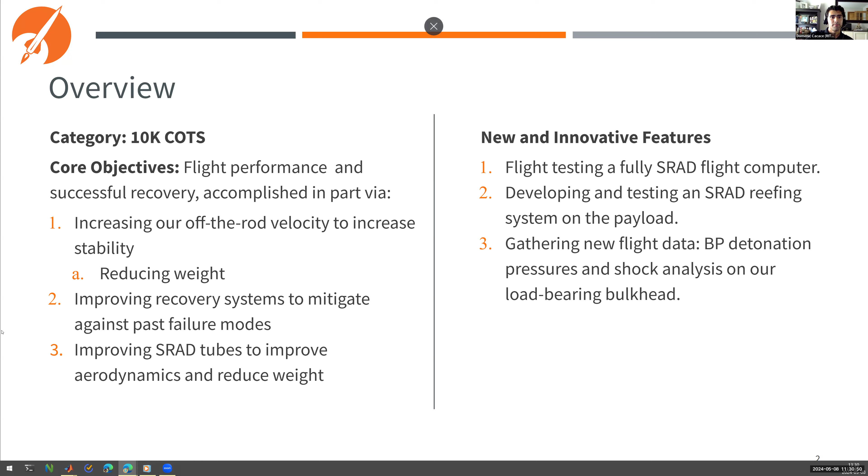So to do a quick concept of operations, most of this is as you'd expect, but to go over some of the main points: immediately upon boost, we've got several different SRAD boards doing data collection on two separate things - the actual load sensing bulkhead we just alluded to, and also some boards on the payload called Grim Reefer. Those will start collecting data and will emit the Fox Hunt trackers for additional methods of recovery as well. So that's right on boost.

We have an M3400 motor from Cesaroni powering this rocket, and the burn time for that lasts around 3 seconds. We'll coast the rest of the way to our apogee, which currently is projected to be around 12,000 feet.

Backing up one second - do you actually have that motor in your possession? No, we don't have that motor. We've purchased it with one of the authorized vendors that ESRA provided, and that will be shipped to the competition where we'll pick it up and assemble it on site. So you've established they actually have the motor. Correct, we've already purchased it and asked them to send it over to Spaceport America. We're following the instructions ESRA has provided in that regard. Okay, I ask because there's some supply issues with Cesaroni motors at the moment, and I want to make sure the motor you think you're using actually exists. As far as we're aware, it does exist. Okay, we'll follow up just to make sure the shipping is going correctly. But to the best of our knowledge, we purchased that back probably upwards of January or December at this point, and it's hopefully been all good for a while now. But we'll double check on that just to be sure.

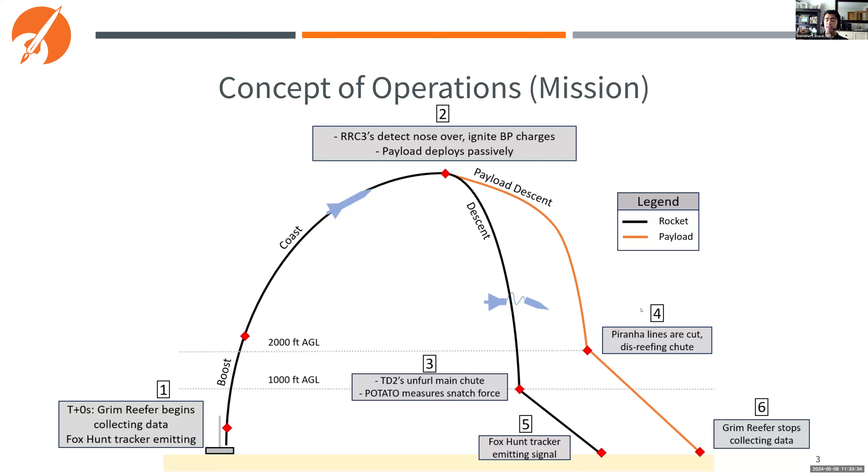The payload will be ejected separately, and as per the reefing system, it'll have its own mission, but instead of deploying at about 1,000 feet, it will unreef and fully expand its chute at about 2,000 feet. But without further ado, that's the overarching mission objectives, and we'll dive straight into some of the more vehicle-specific information.

To give an overview of the structural composition of our rocket, we're using a combination of fiberglass and carbon fiber body tubes. We have 3 tubes on our rocket. The upper 2 are fiberglass and the lower 1 is carbon fiber. All 3 of these tubes we're making in-house with a filament winder with composite tow. We're using 3 layers of 60-degree winds just to give us strength in both the hoop and axial directions.

We've been working on this for a few years, and our big goal this year was just to continue improving our surface finish, which I think we've successfully accomplished. If you have any more specific questions about our tubes, I'm happy to answer. Not at the moment.

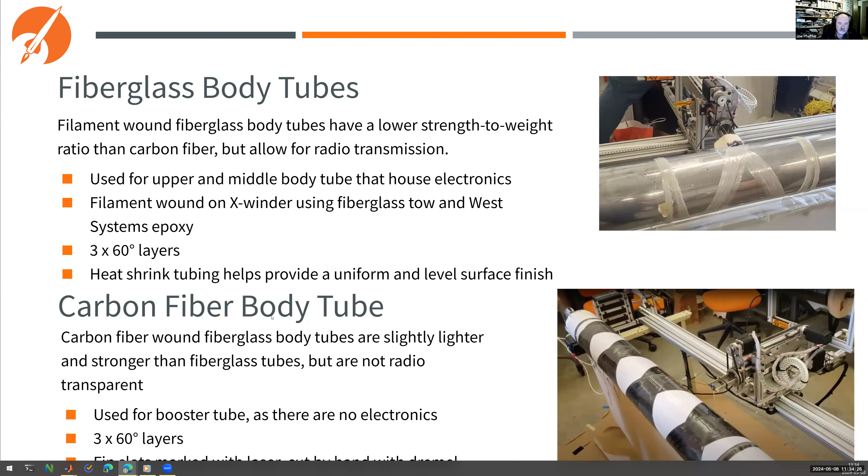For our nose cone, we're doing a fiberglass layup. We've experimented with a couple of different types of molds over the last few years, and we've settled on this 3D printed clamshell mold. We basically 3D print each half, and we do a number of steps to prepare the inside surface to get it nice and smooth. And then we do a fiberglass layup to get the bulk of our nose cone there.

We're using fiberglass because a portion of our avionics base sits inside of the nose cone, and we don't have any external antennas, so we want it to be radio transparent. Only the tip of the nose cone is made of aluminum, and that's just because it's hard to get that fine point with the mold itself.

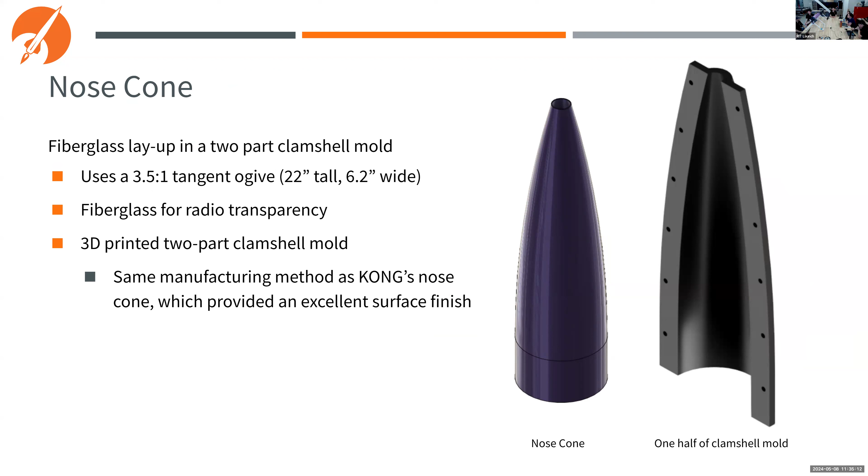I am curious, you mentioned the same manufacturing method as Kong's nose cone. I'm not familiar with them. I'm sorry, Kong is our rocket from last year. Oh, okay.

For our fins, we're using a water jet to cut compressed carbon fiber sheets. We're using 3/16 thickness, which we've calculated to provide adequate safety at our predicted speed. These have an integrated fin tab that slots through holes we've drilled in the booster, and it fits into a fin support structure that we have a few slides on coming up.

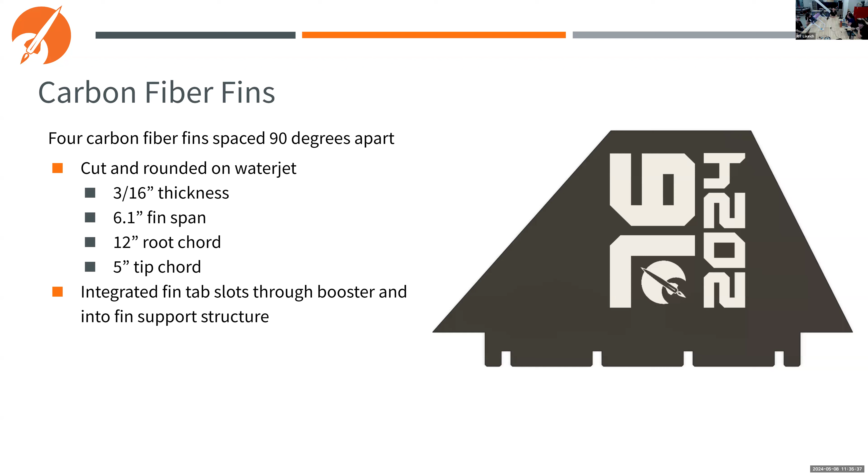Yeah, might as well jump right into those. You mentioned that the thickness was going to be adequate - is that based on fin flutter? Yep, we have some analysis slides coming up later in the presentation that talk about that, but yeah, it's a fin flutter velocity. But let me jump ahead.

I remember on your second report you were using the fin flutter formula from Apogee. Yes, which turned out to have an error. I'm gonna let Donovan hop in here, he's our analysis lead. So we looked at the new article published in December with the corrections, and they had the correction of the factor of square root 2. There was also the correction of a constant that was not actually a constant and depended upon fin geometry, and what really affected that was the sweep length. So we had to redesign our fins a little bit and make the sweep angle less aggressive. Using that new formula from the article, the stuff you see on this slide is from a new sheet I built just to make sure and verify it separately. So this is with the most up-to-date information and those corrections. Okay, thank you.

Hopping back to the fin support structure, like I mentioned, our water jet cut fins have tabs on the ends, and these slot through holes in our booster tube and into a series of interlocking rings and bars that were also water jet cut from carbon fiber. This provides additional bonding area for the epoxy we use to join the fins, and it also helps us get a nice 90-degree alignment and 90-degree offset between the fins.

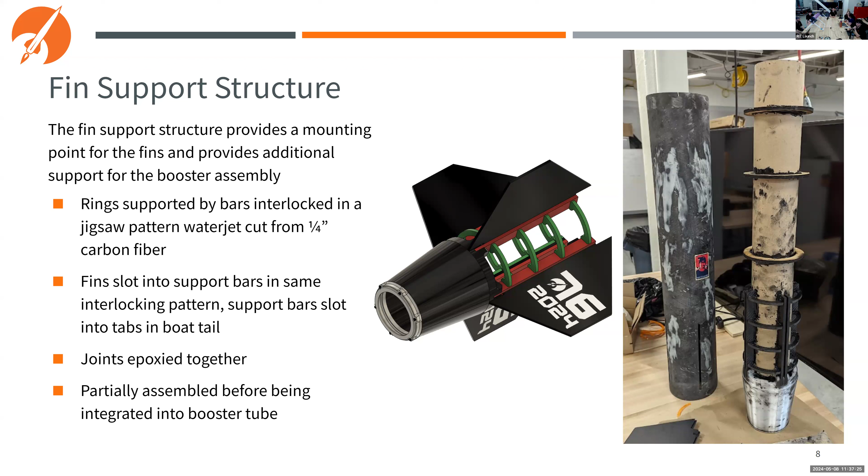For our boat tail, we use this at the aft end of our carbon fiber tube. It slots into the end, and those little tabs you see on the forward end are actually part of the fin support structure, so they interface with those bars. This creates a very rigid assembly at the aft end of the rocket. It also tapers down to, I think, 4.5 inches, and that fits into our thrust plate and motor retainer, which we machine from aluminum.

I don't think we have a slide on those in particular, but fairly standard. Let's see, it's PETG. How is it attached? You can see it has an integrated shoulder at the top end there, and that slides into the booster tube.

It gets epoxied in place. But like I mentioned, it also fits into the fin support structure, which extends another, about 14 inches up into the booster. So it has quite a bit of support holding it in. Then as far as the thrust plate goes on the aft end, that's epoxied in place as well.

It's also worth noting we have compression tested another sample of this boat tail to 1,300 pounds with no failure. So we have at least a 1.7 times safety factor in compression.

The reason I'm really asking is, it's not just epoxied in place, right? It is just epoxied, but there's quite a few locations and components that it's epoxied to. Because with PETG, you don't end up with a chemical bond, you just have the mechanical bond with any roughness in the surface. Epoxy doesn't stick to it.

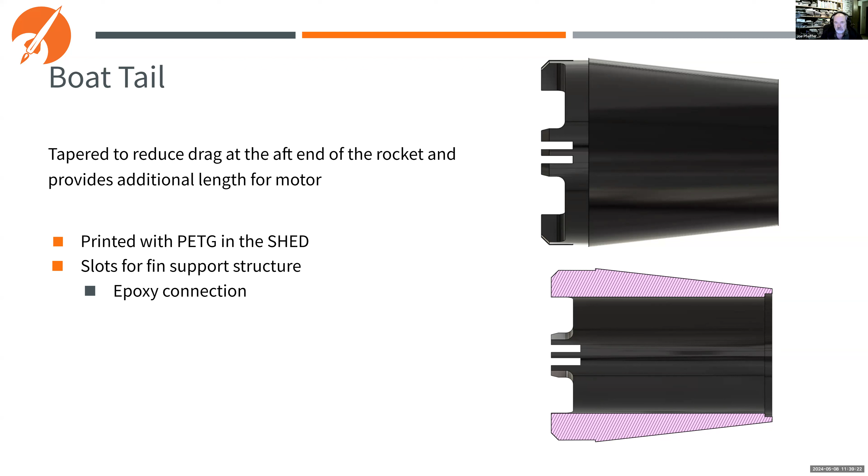Like I mentioned earlier, we have a machined aluminum nose tip that fits into a quarter-inch threaded rod, which in turn fits into a weight-reduced aluminum bulkhead. This acts to compress the nose cone tip into the nose cone, and the bulkhead goes up, and they hold each other in place. We also epoxy that nose cone bulkhead for some added security.

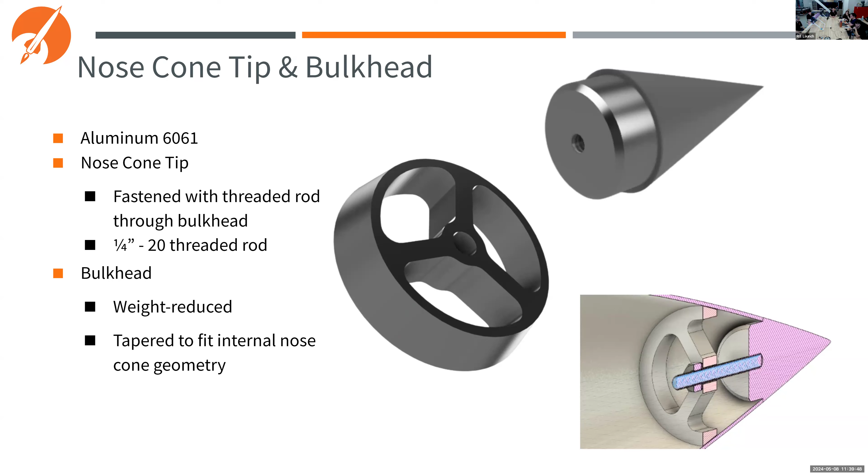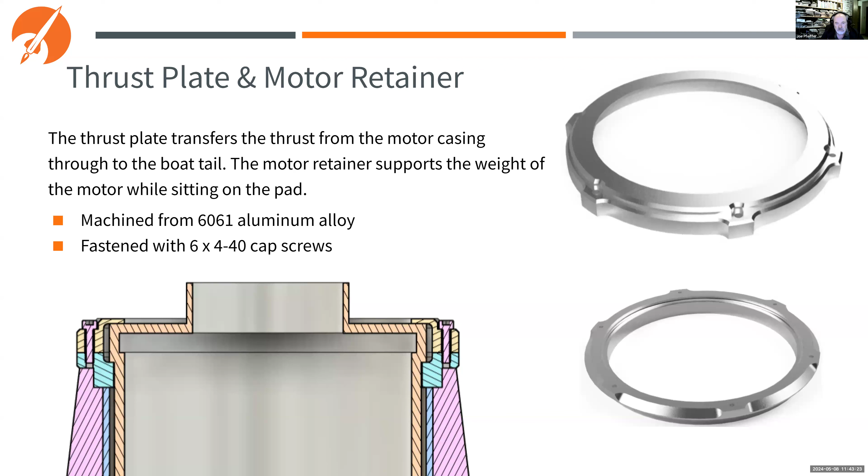So the boat tail itself, we're looking at the 4-inch end diameter of the boat tail, and I can turn it over so they can actually show you, but it's the other side of the boat tail not pictured here. That's the epoxied surface. That's what's retaining the boat tail, and by extension, the motor retainer and the motor casing as well. Let's just remember to return to that when we're looking at the actual rocket later. Okay, continue for now.

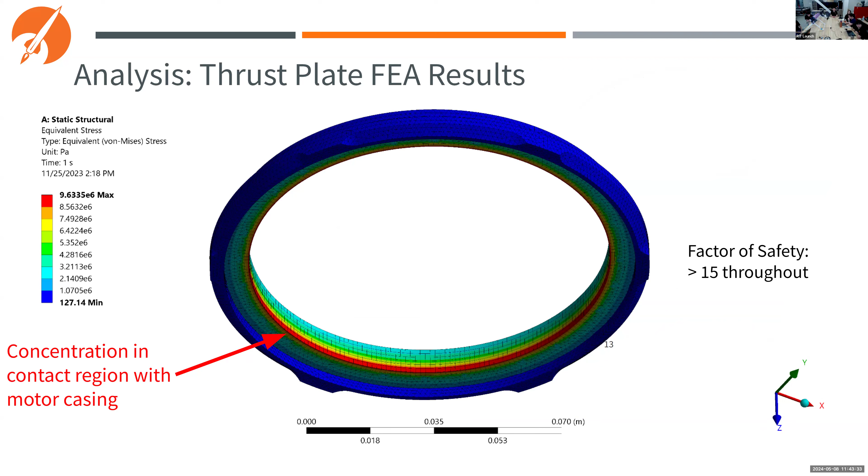Sounds like a plan. So this is just the FEA results for our thrust plate here. You can see that we have a safety factor of above 15 throughout the entire part.

As Donovan will explain later, we have an equation to calculate the drag force. However, it works under the assumption that parachutes completely inflate instantaneously, which leads to a bunch of over-designing of different parts. So in order to get a more accurate representation of what the snatch force actually is, this year we've decided to implement strain gauges onto the forward bulkhead. They're going to be arranged in a half Wheatstone bridge configuration with 2 extra strain gauges to work as temperature correction, in order to measure strain and then calculate the force affiliated with that.

Cool, I like that. Thank you.

So for actually measuring the snatch force, we designed our own board because the issue is it's such a small voltage we actually get. And since, as Lexi kind of alluded to, we decided to put strain gauges on our actual bulkhead and not risk the load path going through a load cell, which is not rated for these high shocks, we actually designed our bulkhead to just deform with the strain gauges. That's such a small voltage, we had to design our own SRAD board.

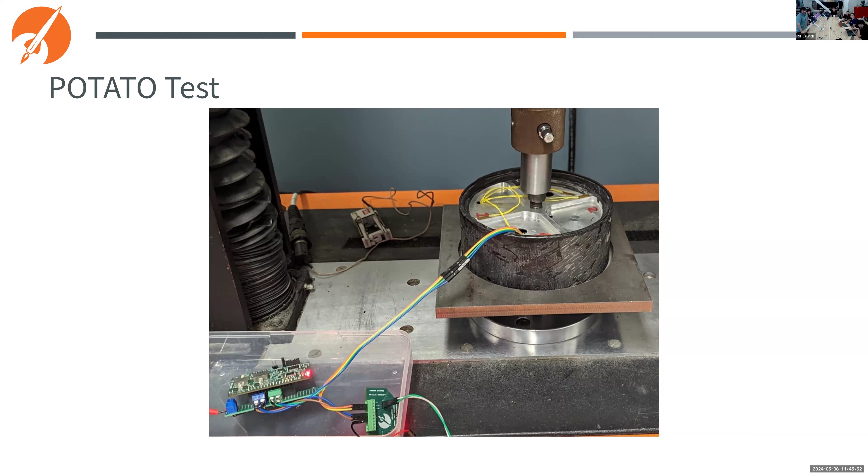All right, so moving into the analysis section, we did a lot of open rocket simulations this year after last year's very windy launches. We wanted to make sure that our rocket would be okay in high wind conditions, as opposed to last year where we did it in the default wind condition, which is 5 miles an hour, and didn't really play around with higher wind speeds like we had experienced actually at the launch site.

And that's a modular set of masses. So based on the final weights right before we go to the pad, we can screw or unscrew steel discs to the threaded rod to make sure that we still have adequate stability for flight.

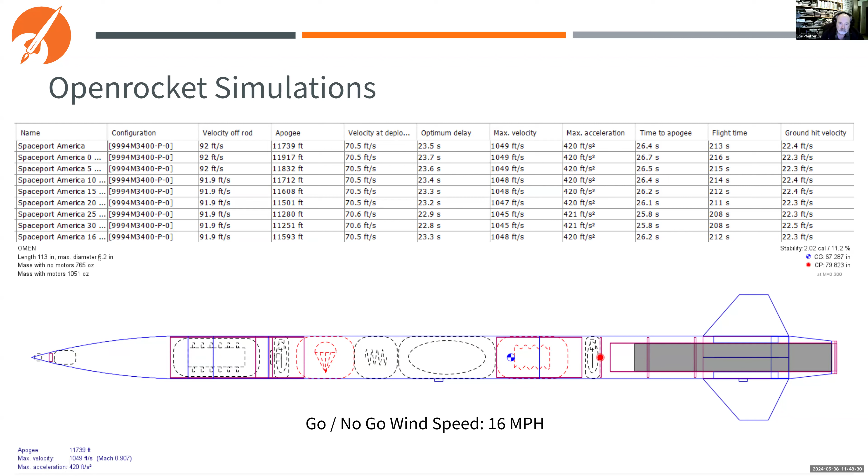So one of our justifications and the things we were doing this year is looking at our stability and angle of attack off the rod, because one of the main failure modes last year with Kong was as soon as it left the rod, it canted by about 30 degrees, significantly impacting the flight profile.

So what we wanted to do this year was make sure that wouldn't happen. So our stability off the rod is cal and a quarter, which is pretty good. The angle of attack is 7.5 degrees, which also, referring back to that launching safely in the 21st century article, under 15-degree angle of attack your stability needs to be within the okay margin. We're very much under 15 degrees, at half of that, and we still have an adequate stability.

Okay, give me just a second to look something up here. Did you say your stability margin is about 1.25 calibers? Right off the rod, yeah. And then it goes and reaches its max at about 3.25. Okay, that's a little cut off in this figure, but what Open Rocket will do...

One issue here is the DTEG wants 1.5 calibers. Now you mentioned you have some weights that you can put on to adjust the center of gravity. Are you going to be able to get to 1.5? I believe so. We'd have to add probably one more disc, but it's not too much of an issue. We have plenty of extra stock, and we can just get a longer threaded rod to put that on.

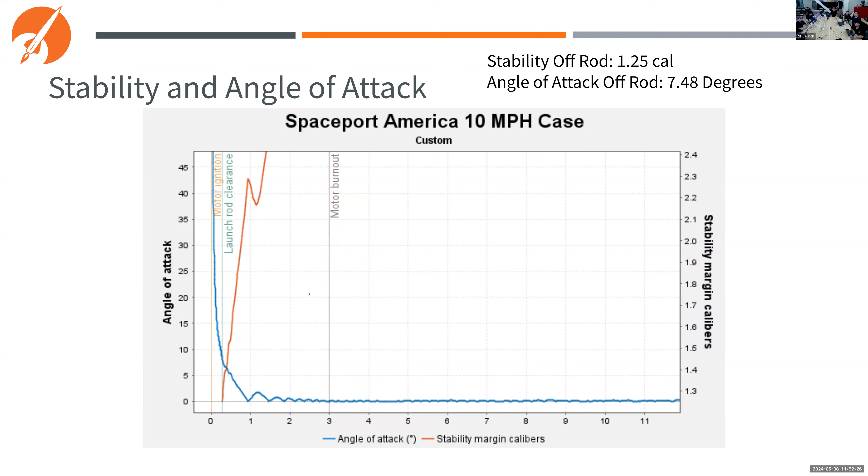All right. Okay, awesome. If that's all, we can—okay, yep, perfect.

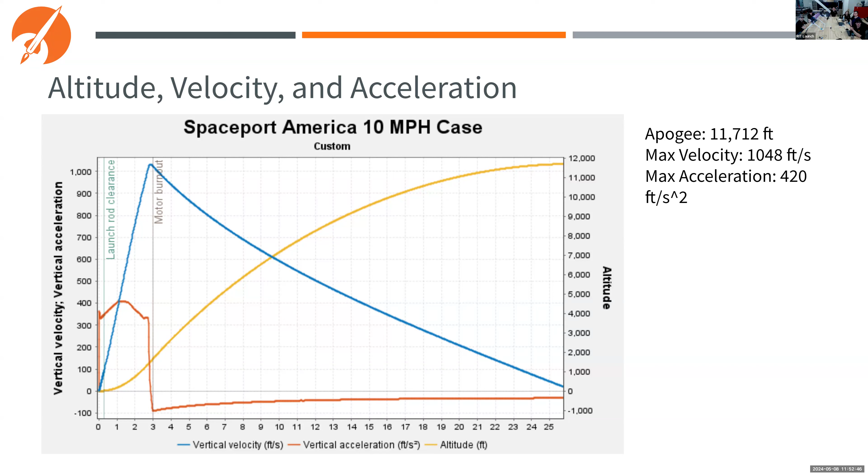So next, moving on. Using the average wind case of 10 miles an hour, which is hopefully what we're going to be experiencing, at least somewhere around that, our apogee is about 11,700 feet with a max velocity of just over 1,000 feet per second and a max acceleration of 420 feet per second squared.

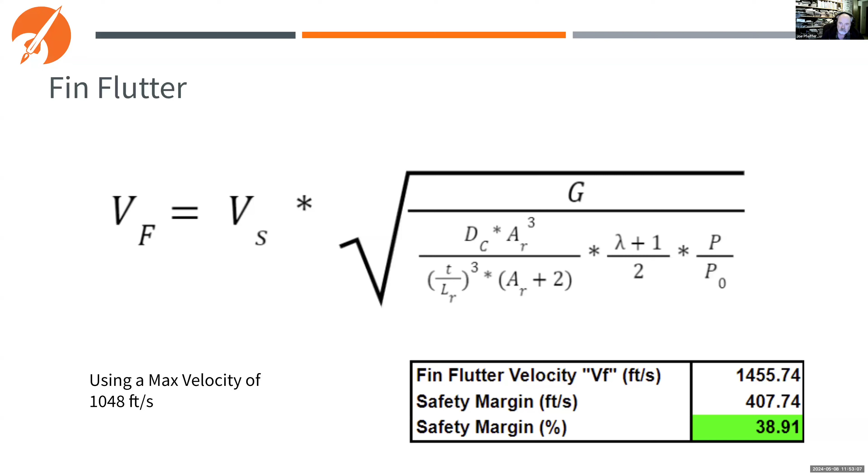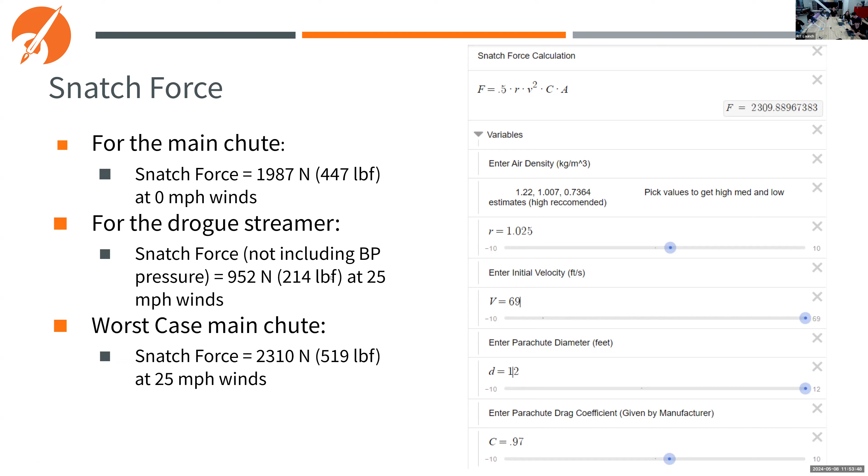This snatch force gets distributed between the two sections of the rocket. Looking at how much gets distributed to each eye bolt and bulkhead, we have about 50.5% of the mass in the upper section, because we added extra mass in the middle so it gets a bit heavier. We're expecting that section to experience about 262 pound force, or 1167 newtons, of snatch force, and the booster section will experience about 257 pounds, roughly 1142 newtons, of snatch force.

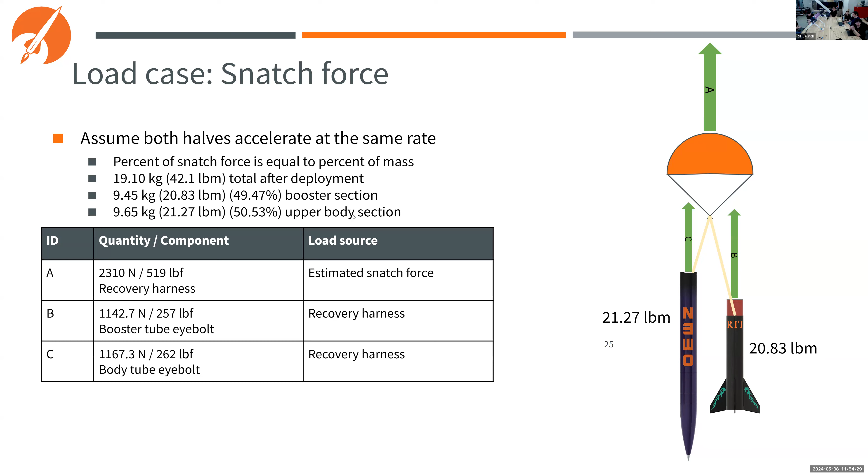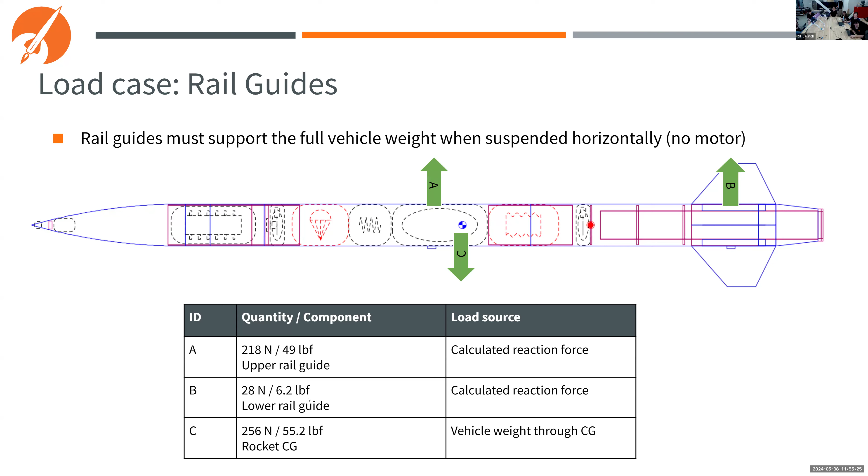Moving on to Avionics. For our flight computers, we're using RRC3s, reusing the ones from last year since those are flight tested, and we also have backups. We retested them and verified they're still functioning. We're also flying the same style tracker, the Big Red Bee. We know this tracker pretty well, so we've just applied reusing the hardware since we know it.

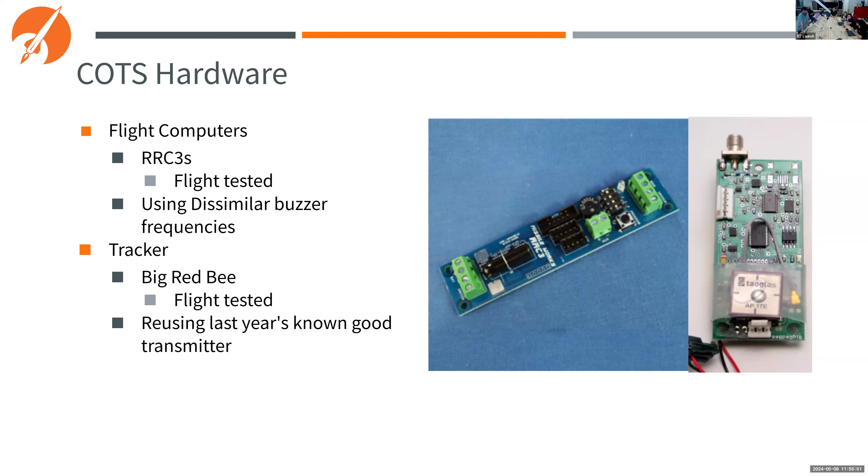Backing up just a second - you say lithium ion, you do not mean LiPo, right? You mean lithium ion. Yes. We have 18650 cells arranged in various 2S or 1S setups.

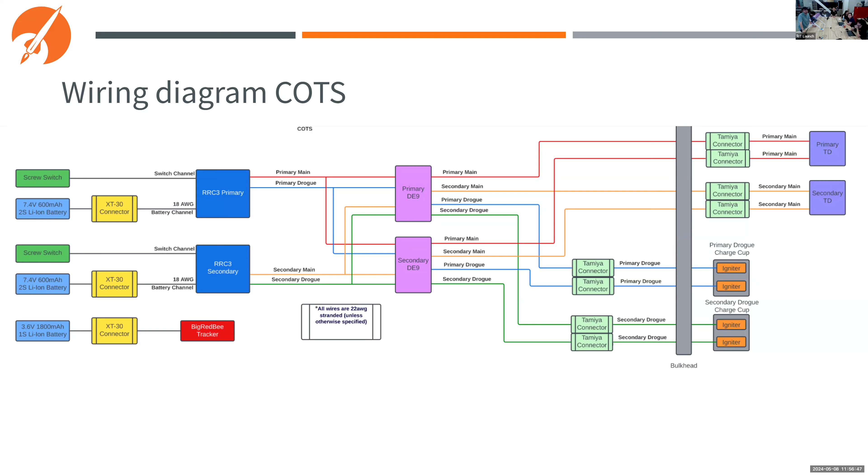For the bridge wires, this is a more detailed shot. It shows that we actually do ensure that even if we lose one DE9, we still have dual redundancy.

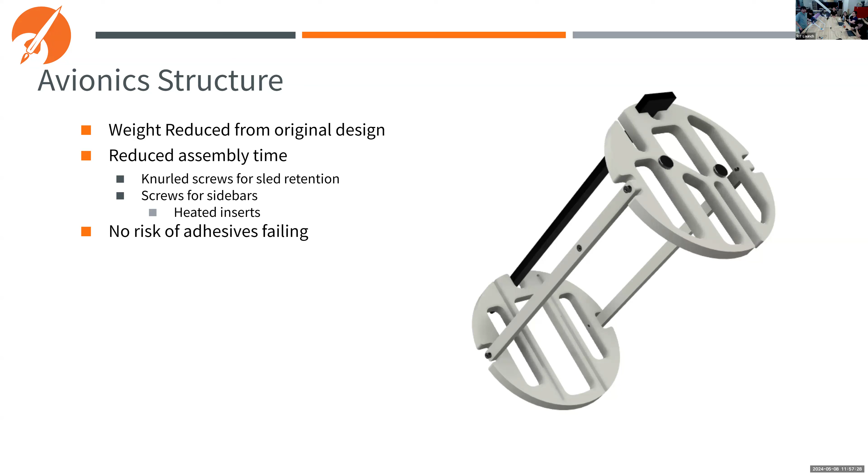For the structure, we made the entire thing out of Delrin this year, mainly because it's easy to machine, easy to laser cut, and fairly low friction. So sliding things together is pretty seamless, and it's not going to wear out from the friction of moving things back and forth - our slides won't get damaged or fatigued from repeated assembly. We used to use plywood because it's very cheap and structurally good enough, but over repeated assembly it starts to become a problem.

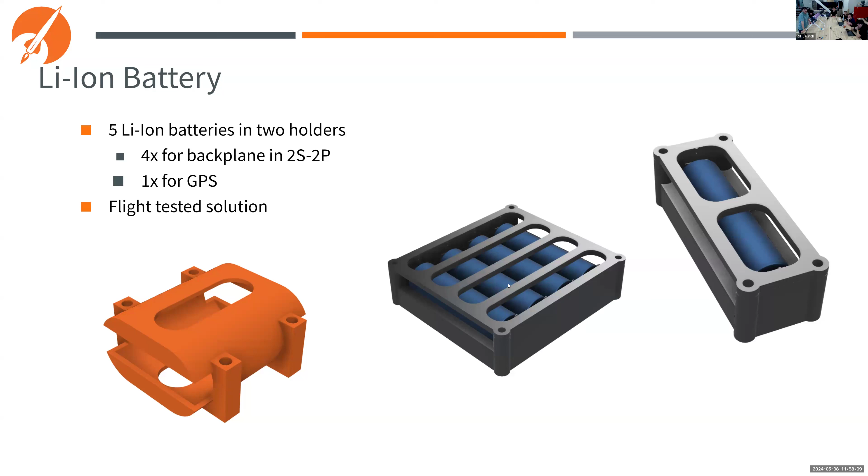For our analysis of the structure, we basically assumed the instantaneous force of the boost, then looked at the weight of the avionics bay and applied those forces to our joints. Since our avionics bay has all the weight of the sleds on the end cap, we assumed the worst case where it's pushing down on the little load tracks there. From there we ran the analysis and figured out factors of safety. We found a factor of safety of 3.16 for our 200 newton load representing the entirety of the weight of the avionics bay, which was already an overestimate compared to what it's come out to currently.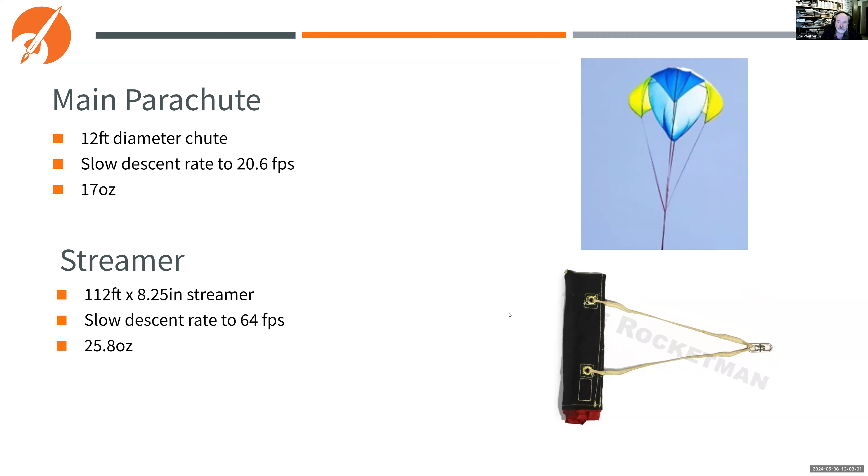Moving into some background information. Last year, our rocket's shock cord split in flight, and the booster section fell without a parachute and without a tracker into the desert.

Fortunately, we were able to recover that, but in order to mitigate that failure from happening again, we added fox hunt beacons in both the upper and lower section of the rocket. This way we can radio locate both sections of the rocket independently if they separate, or we have two radio location beacons in the rocket if it falls down in one piece and we lose GPS.

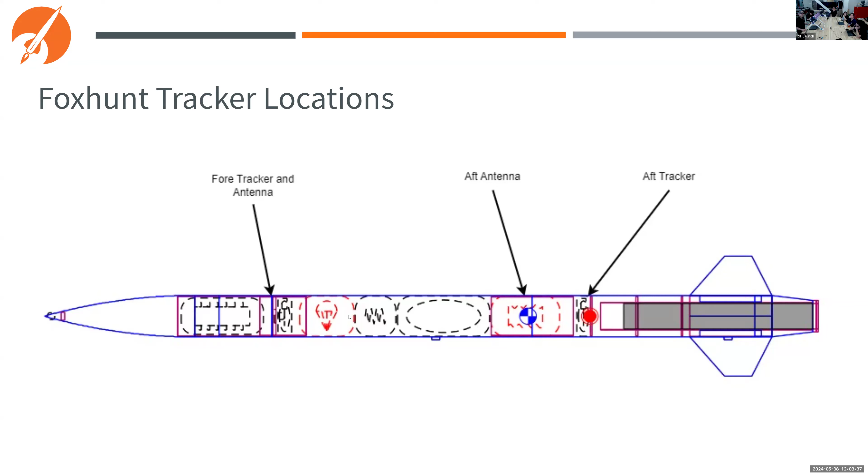And finally, for our BP charge sizing, we only need deployment charges for drogue because main deployment's controlled by the TD2s. So we utilized a community source calculator that we have used in the past and deployment testing to ensure that our 6.6 gram primary and 10 gram secondary BP charges are sufficient.

And those are substantial black powder charges. They are. We have a very large deployment bay because of the single bay design as well as the payload needs to exist in that bay.

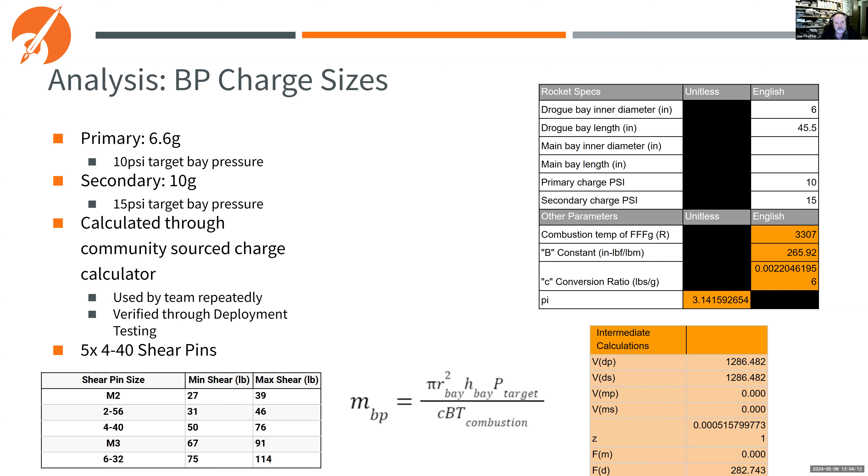Immediately after that video ended, we went up and started pulling on it, on both the upper section and the booster. And just with slight pulling, the streamer came out and deployed successfully, but the main parachute did not. So that was kind of a verification that our topology would work.

Moving on to our payload. Our payload's mission this year is going to be testing an SRAD reefing system. It's going to be a purely mechanical test, so we're not going to be implementing any custom PCBs for deployment of the reefing or disreefing.

We're going to be monitoring the snatch force on the parachute using a load cell. We'll be monitoring it both at deployment and at disreef to see the effects of it. That'll be monitored by our SRAD PCB, the Grim Reefer.

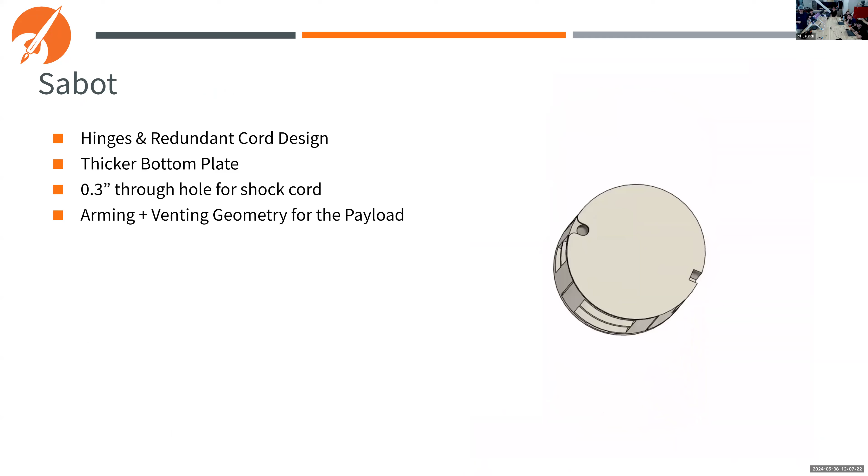The Sabot itself, here's a quick cut of it. Whenever we open it up, we can show you it in more detail. It has a thicker bottom to kind of prevent breaking with the force of the 8.8 pound payload pushing against it during deployment, as well as previously mentioned, arming geometry and venting geometry for the payload itself to make sure that all of our...

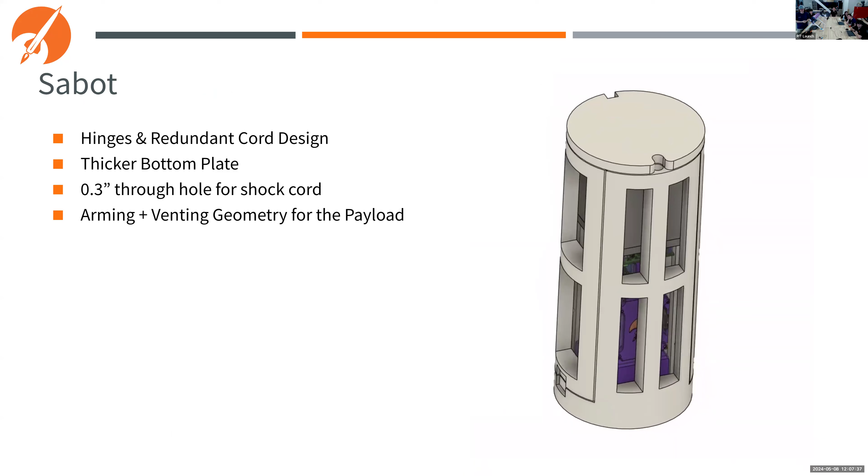If we can go back a couple slides again, I am a little bit curious about your line cutters. In particular, there's no way that you can end up with a piece of line coming loose in the desert, is there?

No. And the reason for that is because the reefing system uses two separate loops that are anchored into the parachute. The control line is connected to both of those loops simultaneously at a connection point in the middle, and then it is pulled downwards to the piranhas. So when it's cut, those will still be connected to the two loops that are anchored.

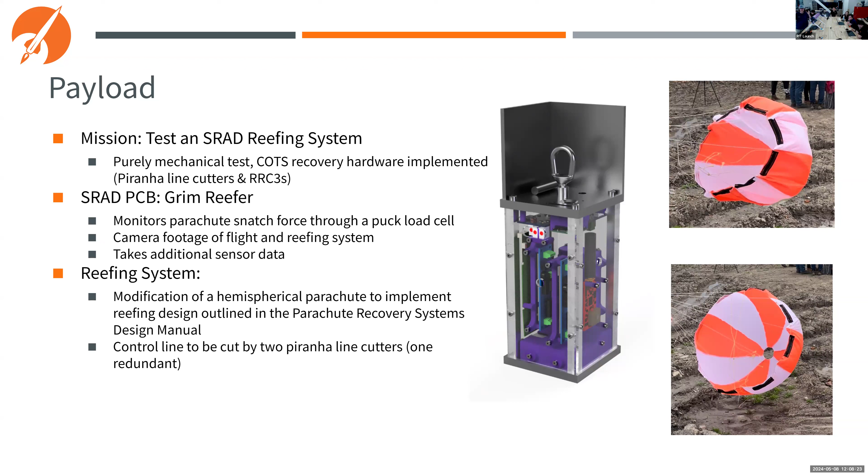Moving on to some analysis for the payload. We wanted to do some snatch force calculations to make sure the payload and all of its recovery components can survive. Using that same general drag force equation gives us a solid overestimate. We gathered that in the worst case, if we disreef at apogee, assuming the reefing system fails, we're hoping it doesn't, and we've done a lot of mitigation. But in that case we wanted to make sure everything can survive, and that's where we're expecting a little over 1,000 newtons of force.

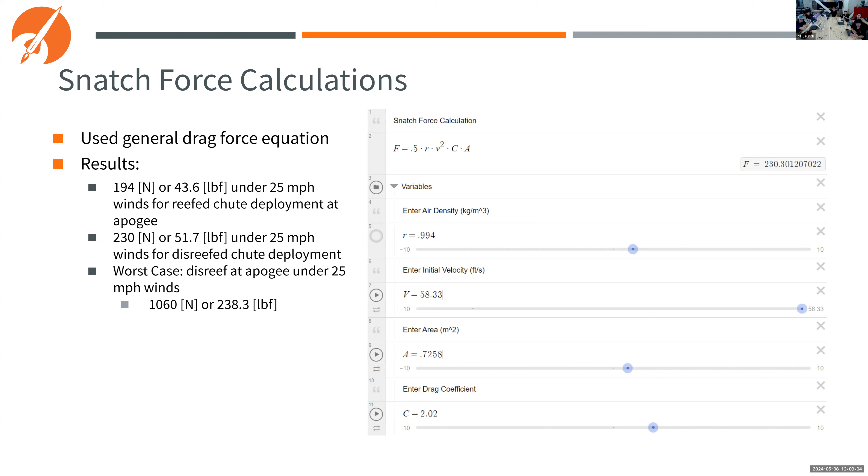Moving on to the next slide, we did some FEA and looked at the data sheet to spec our components to make sure they could withstand this force. The recovery bay, made of steel, can very much take that force, as can the aluminum posts. The thing most at risk is the load cell. Right now with 200 kilograms, that's the full scale reading of the load cell, which is when the sensor breaks, not when the steel or metal around the load cell breaks. Since we couldn't find anything about when the physical part will actually snap, we know it's going to be higher than 200 kilograms, so if it's safe at 200 kilograms, it will be safe at whenever the metal actually snaps.

The eye nut is also going to be safe at 1060 newtons.

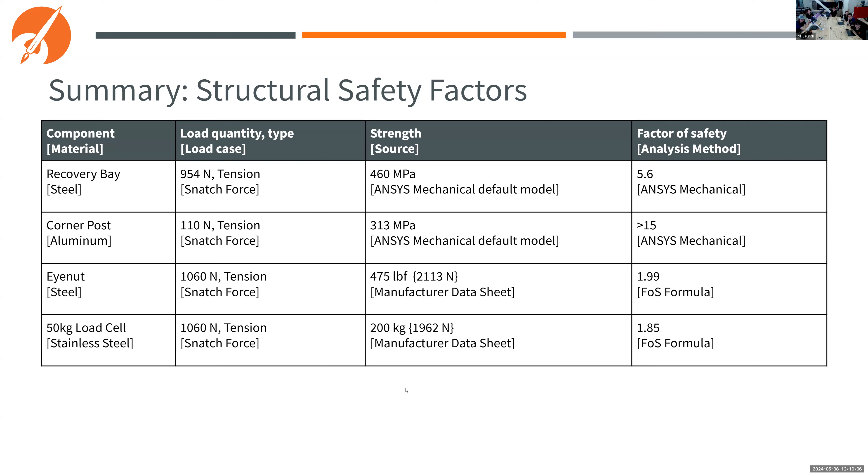I believe this is the end of the presentation. Okay, this is looking like a very nice piece of work. Thank you. Let's take a look at the rocket itself now.

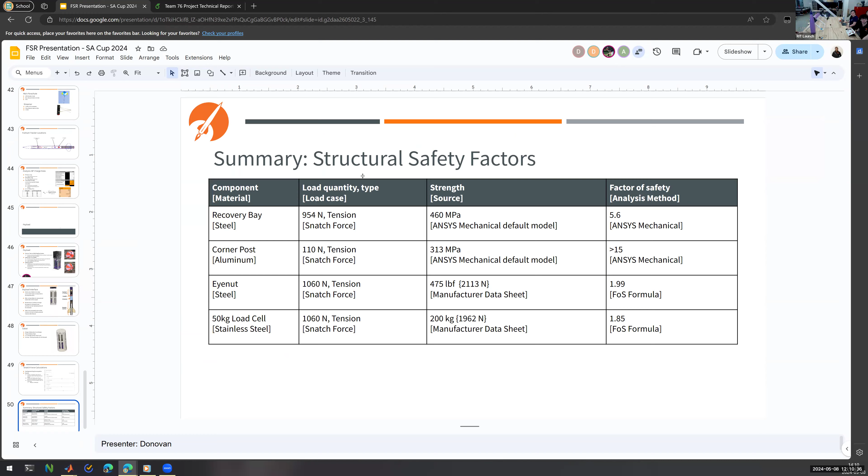Oh yeah, we have a camera. Should you turn the camera? It's already been set. I'm going to stop sharing. Can we switch? Oh, it has to be... okay, there we go. Oh, that's weird. Unfortunately, it has to be vertical, it seems. That's unpleasant.

So where would you like to start? At the nose. All right.

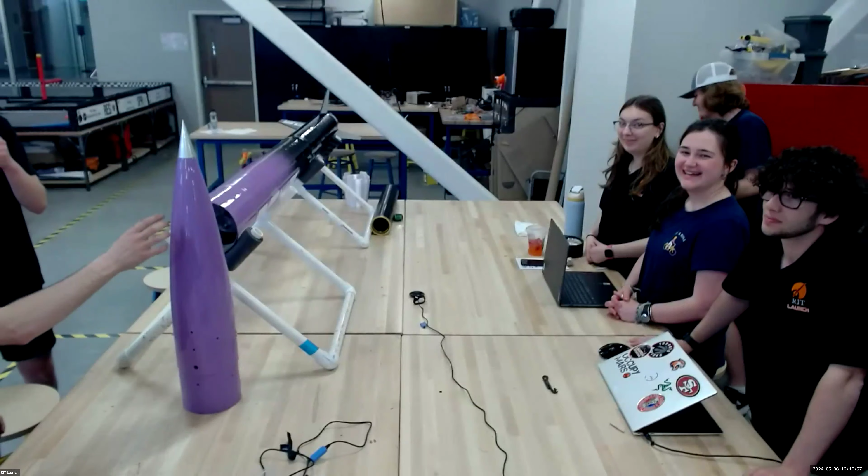So what are you using for a tip protector there? It's a crocheted wizard. It has some bones inside so that we don't damage the crochet. This is to protect both the tip protector and the tip, and to protect people from the tip, but that's its main purpose. All the teams seem to be coming up with fun tip protectors.

So let's take a better look at the nose cone there. Got the nose cone. We also have the avionics bay inside of the nose cone right now, in case you want to look at that as well. Sure, let's pull it out and take a look. All right, it's easier to do with the drill.

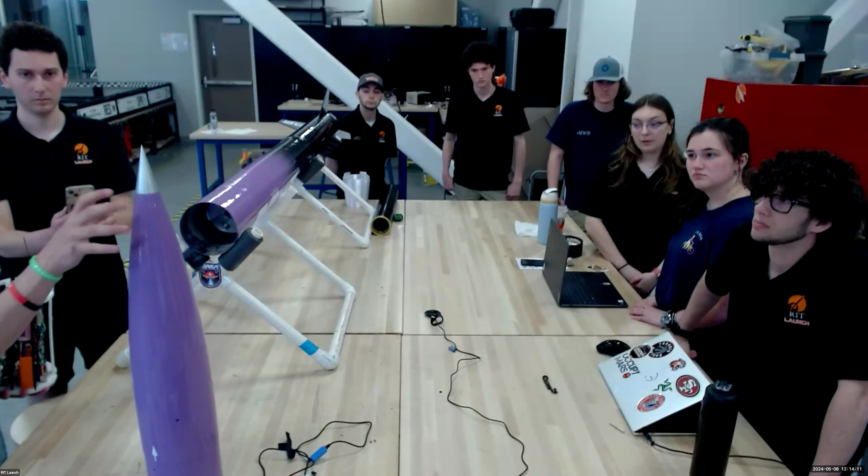Yes, or sorry, the avionics side of the deployment bay, which is just the top of the bulkhead where we run these wires through. It's just the bulkhead that's in there.

So I can angle this. In here, we have two holes right here by the bolts where we run through our wire, and then we fill it with caulk so we can get a good seal in there. That way we can get our charge wires in there. Additionally, this wire on the right here is for sending signals to our strain gauge measurement stuff.

That's a go. So that's the nose cone section, pretty much in full. Okay, and so then there's, here, I'm gonna let go to this side so you can see where you're at.

I think I see a joint in the body just aft of the nose. Yeah, so this is actually something that we implemented coming from last year. Last year we had a very long section of tube you'd have to reach down to get to the deployment side of the bulkhead. So this year we essentially took that long section and broke it into still a long section, but then a much shorter section that splits right before the bulkhead to provide easy access to the deployment side. And so this does not separate in flight, it's just held on with 3 M5 screws for easy access.

Okay, so Alan's going to pull that out. We do have our whole assembly in place.

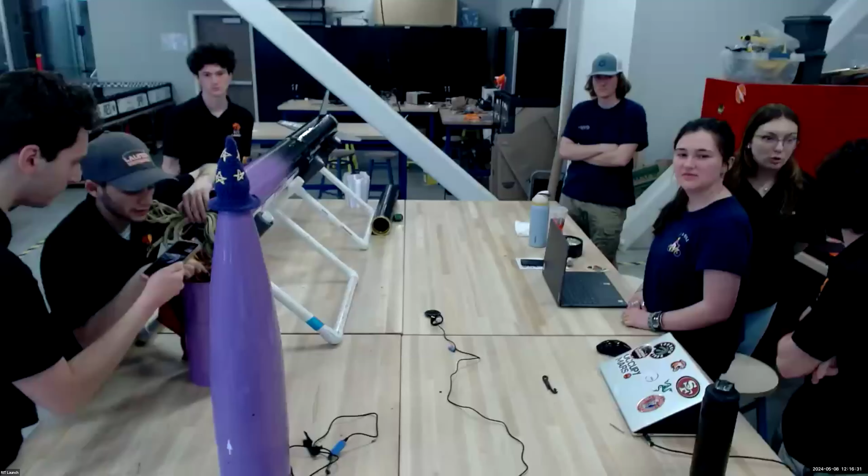And let's see, your igniters for your black powder charges, are they just coming up into the bottom of the charge wells? Correct, there's little holes down here, and they are big enough to run 2 E-matches through. On the other side of the E-matches there'll be a crimp connector so we can attach those directly into the aft bay. So they run through those small holes there.

From here, we got our main line as well as our retaining line for the TD2s. Got our flying blanket. It's worth noting, this is not actually how it comes out of Apogee, because this is the non-separating joint. It would come out over.

We got our 2 TD2s, see how the retaining line's attached. So if we separate right here and we separate up here, this is going to come loose, but our line is attached such that this won't fall away from the rocket.

Here we got the parachute bag coming out. Once again, this will be constrained in the rocket during flight.

One of the main things we do is when we Z-fold all of our shock cord, we put some blue painter's tape around it. We do this so it will stay together and it's really easy to integrate, but as soon as you put any force on it, the tape breaks and the shock cord can unfurl.

This orange line right here is the static line that Brax mentioned earlier. This attaches up to a quick link right here, and so when the payload deploys, this line goes taut after about 15 feet of payload falling, which pulls out the payload's parachute bag on the payload's parachute to deploy.